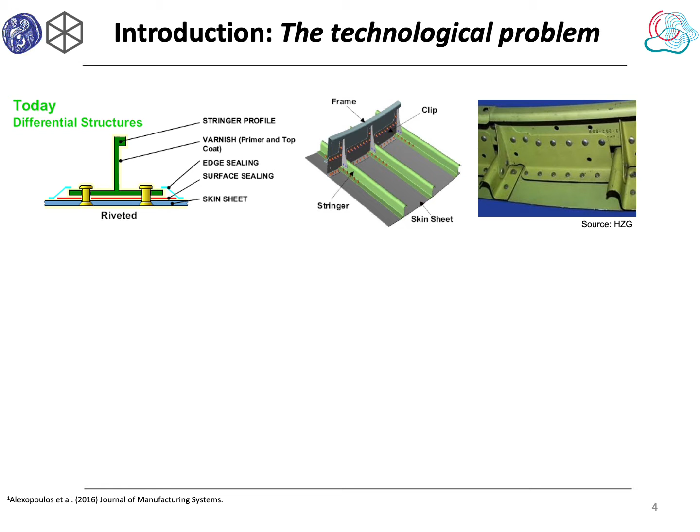Beginning with the technological problems, all traditional design of aircraft structures have been made by fastening differential structures with rivets. It is obvious that riveting increases structural weight. The new trend involves joining techniques as to replace riveting with fusion welding. It is estimated that structural weight can be reduced by 15% and respective cost by 30%.

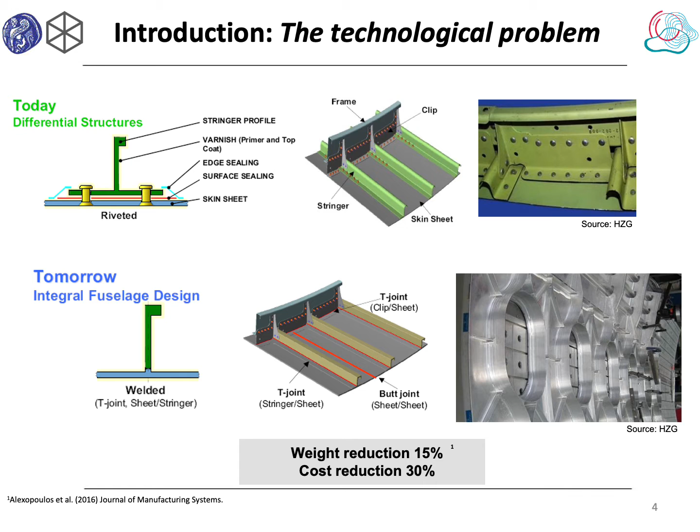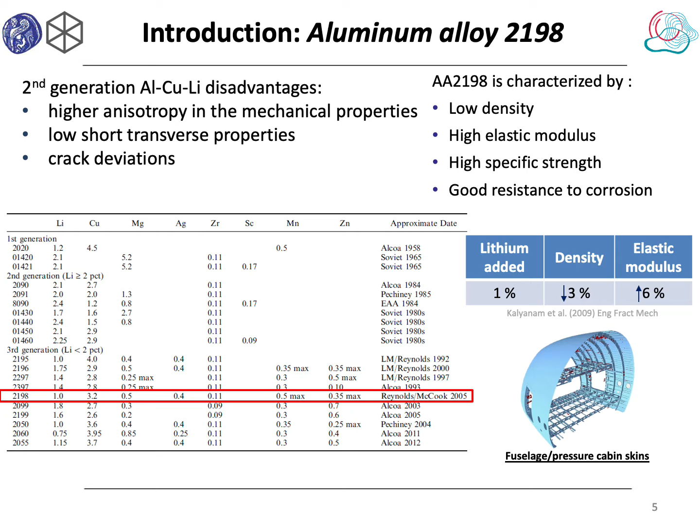Lithium is a metallic element with low density. Therefore, it was introduced to aluminum alloys to reduce weight. Nevertheless, this attempt had specific disadvantages, for example, high anisotropy in the mechanical properties. Aluminum alloy 2198 is a third-generation alloy with lithium and copper addition and has been recently developed.

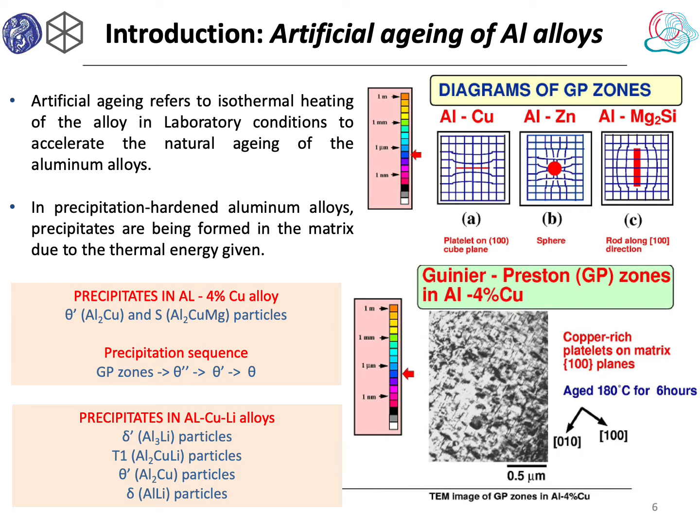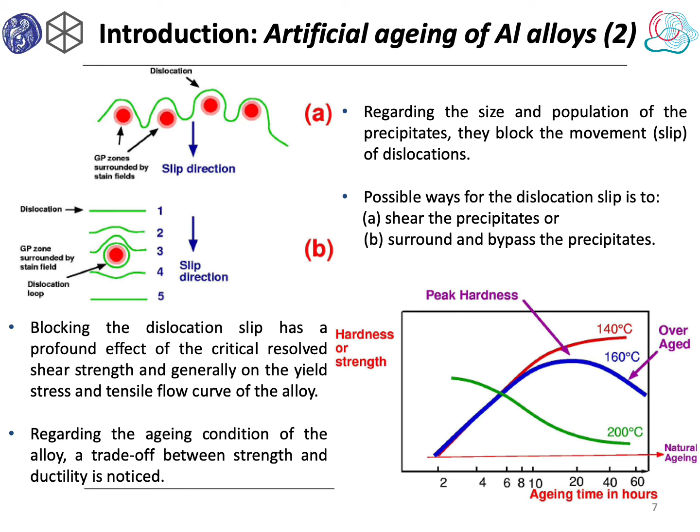This alloy is a precipitate alloy. By this I mean that with natural aging or with artificial aging, the quasi-static properties are changing. We don't have one mechanism, but we have 4 different, so that makes the situation more difficult. But why do we need these precipitates? Because they are blocking the dislocations. By blocking the dislocations, you can increase strength and you sacrifice ductility.

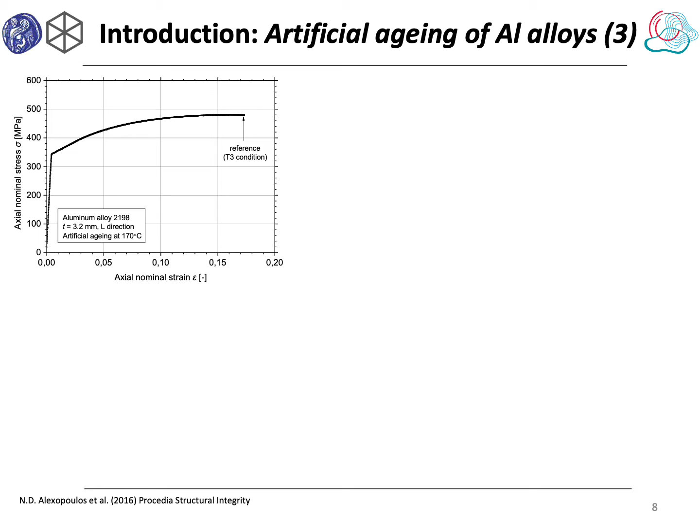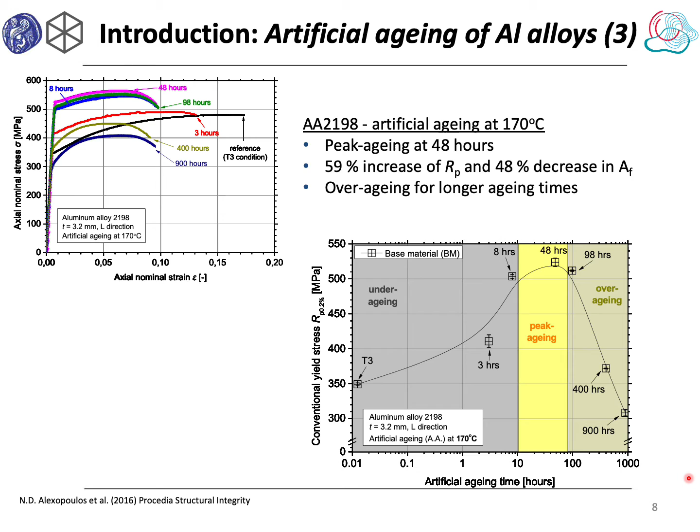The tensile mechanical behavior of various artificial aging times was examined in the literature. Here we can see stress-strain curves with increasing aging times up till 900 hours. More analytically, yield stress continuously increases with aging time up to 8 hours. This increase in yield stress is characterized as the under-aged region. A plateau in the yield stress was noticed from 8 hours up to 48 hours aging time, which is characteristic for the peak aging condition. Finally, by further increasing the artificial aging time to 98 hours, there is an essential decrease in the yield stress due to the coarsening of the precipitates, so this heat treatment condition is considered to belong to the over-aged region.

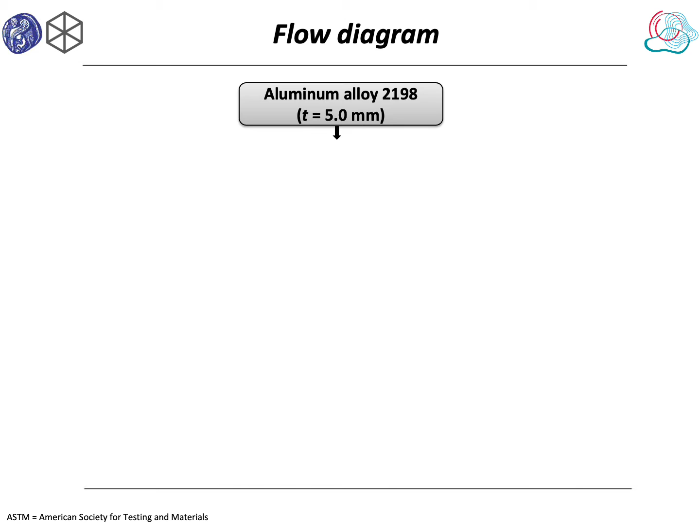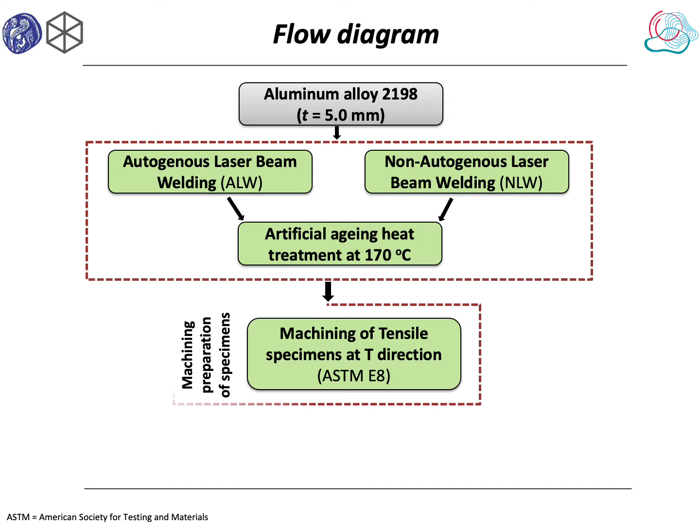Continuing with the experimental procedure. We investigate aluminum alloy 2198 with 5 mm thickness. Some of the sheets were autogenously laser beam welded, and some of the sheets were laser beam welded with filler material. Then the sheets were post-weld heat treated at 170 degrees. From both welds, tensile specimens were machined, and then we had the microstructure analysis, the mechanical testing, the evaluation, and the conclusions.

For the welding, we used a fiber laser with maximum 8 kW power. Argon was used as a shielding gas for both autogenous and non-autogenous welds. For non-autogenous welds, aluminum silicon 4047 was used as a filler material. Here we can also see the welding parameters that were used.

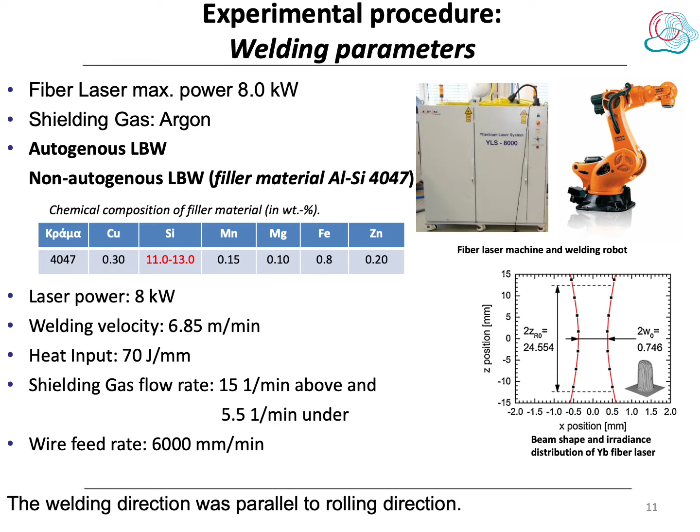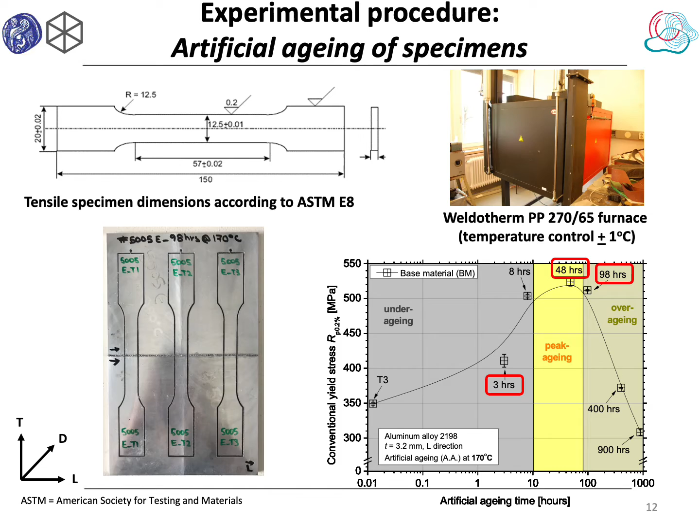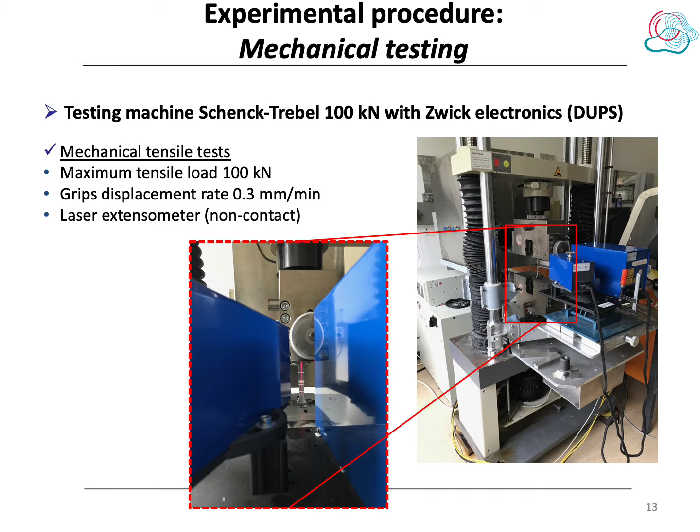This slide depicts the standard tensile specimen geometry according to the ASTM specification. The artificial aging heat treatments were performed in the furnace at 170 degrees and for 3 different artificial aging times, which were selected according to the literature, namely 3 hours, 48 hours, and 98 hours, in order to correspond to underaging, peak aging, and overaging conditions respectively. The mechanical tests were carried out at Helmholtz-Zentrum Hereon with a testing machine using maximum tensile load of 100 kN.

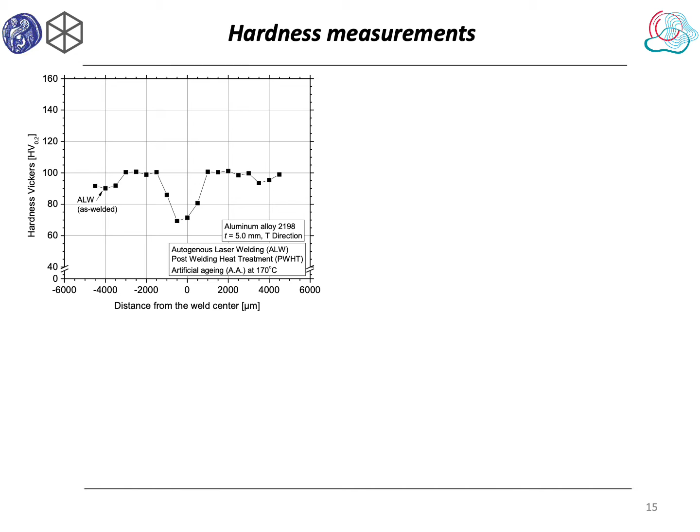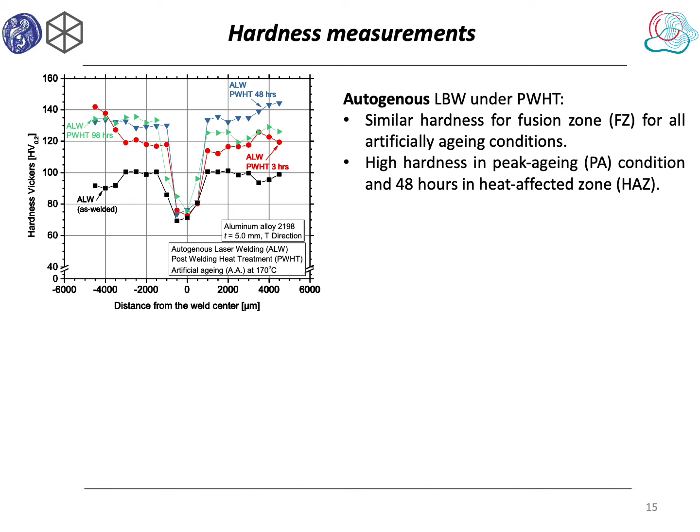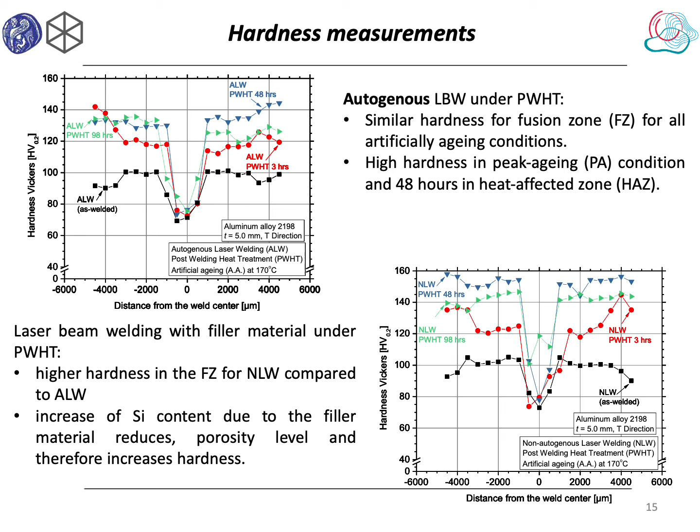Continuing with the analysis of the results, here we can see Vickers hardness versus distance from the weld center for autogenous welds under different artificial aging conditions post weld. With increasing aging time, the fusion zone presents similar hardness for all conditions. Higher hardness can be noticed for the peak aging condition at 48 hours. Non-autogenous laser beam welds with increasing artificial aging times present higher hardness compared with autogenous welds, which can be attributed to the use of the filler wire and the increase of silicon content.

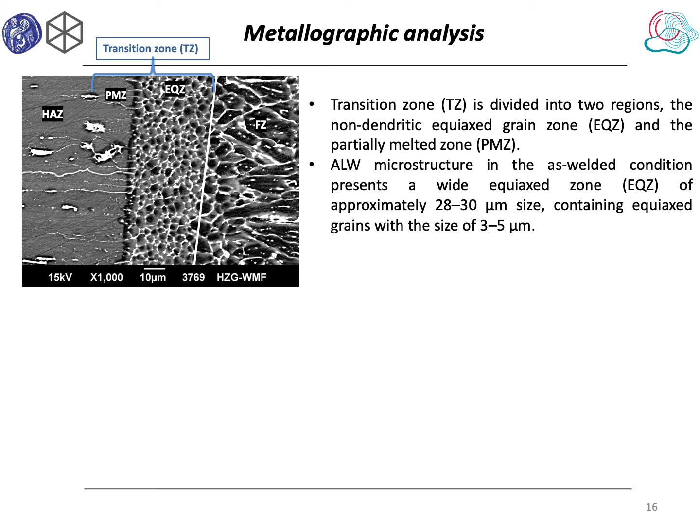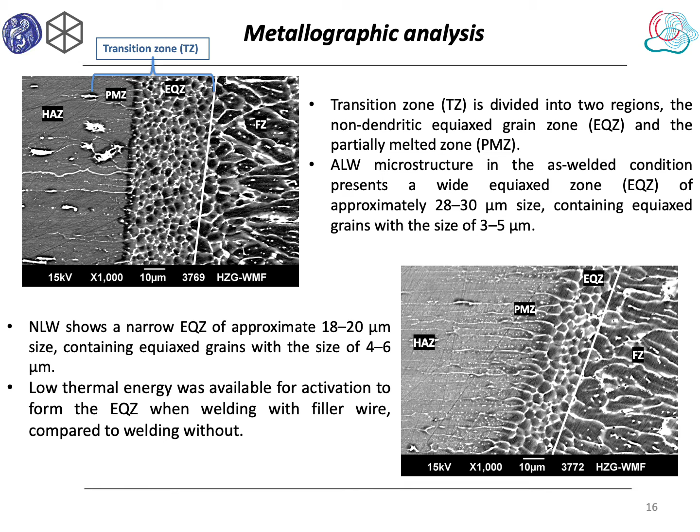For the metallography analysis of autogenous welds and non-autogenous welds, the transition zone is divided into two more zones: the equiaxed zone and the partially melted zone. The equiaxed zone contains equiaxed grains with random crystal orientation. The fusion zone next to the equiaxed zone is composed of columnar grains and in the center of the fusion zone of equiaxed dendrite grains. Non-autogenous welds show a narrow equiaxed zone due to the low thermal energy during welding when compared to the autogenous welds.

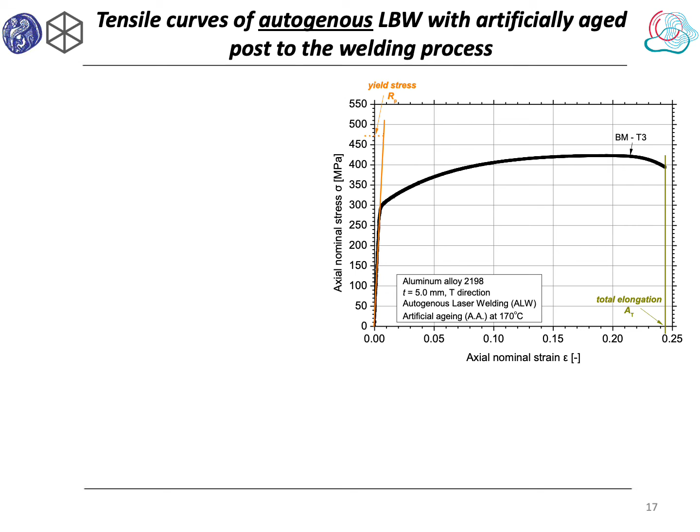For the tensile stress-strain curves of the base material, with increasing aging time, total elongation at fracture reduces from 24% to 13%, while strength increases up to 48 hours and peak aging condition. For autogenous welds, with increasing aging time, ultimate tensile strength increases up to 260 MPa, while total elongation at fracture decreases from 4.5% to approximately 1%.

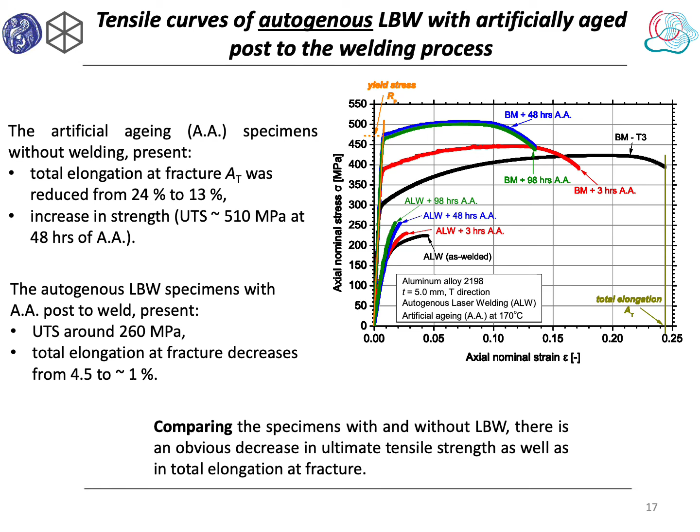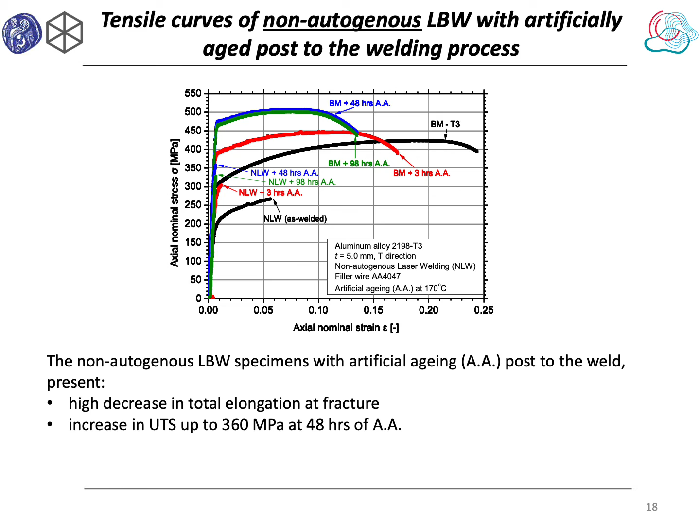Comparing the specimens with and without laser beam welding, there is an obvious decrease in ultimate tensile strength as well as in total elongation at fracture. Non-autogenous welds, with increasing aging time post to the weld, present a higher decrease in ductility and an increase of ultimate tensile strength up to 48 hours and peak aging condition.

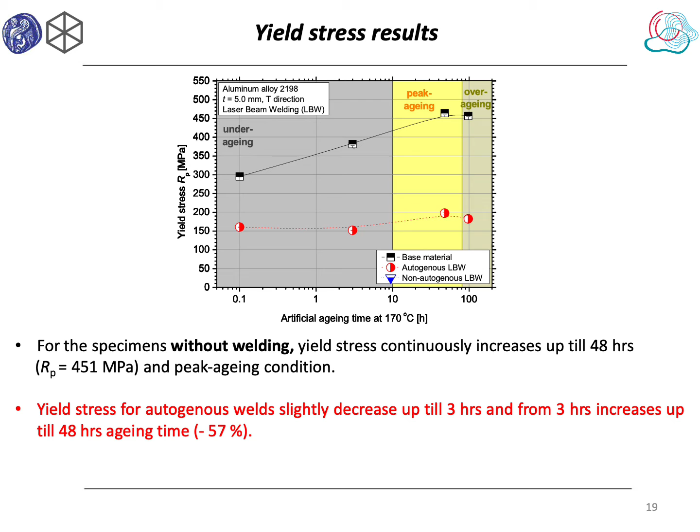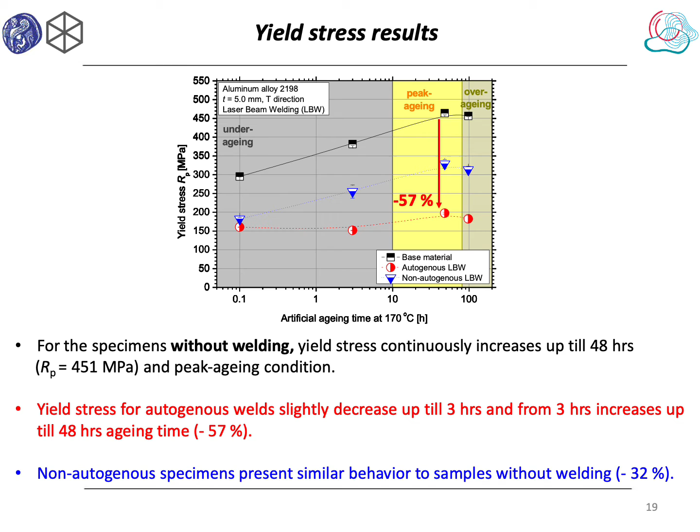Here we can see yield stress versus artificial aging at 170 degrees. Base material specimens present a continuous increase up to 48 hours and peak aging condition. Autogenous welds, with red, present an increase from 3 hours up till 48 hours, which is approximately a 57% decrease compared to the base material. Non-autogenous welds, with blue, present similar behavior to the base material samples with a decrease of 32%.

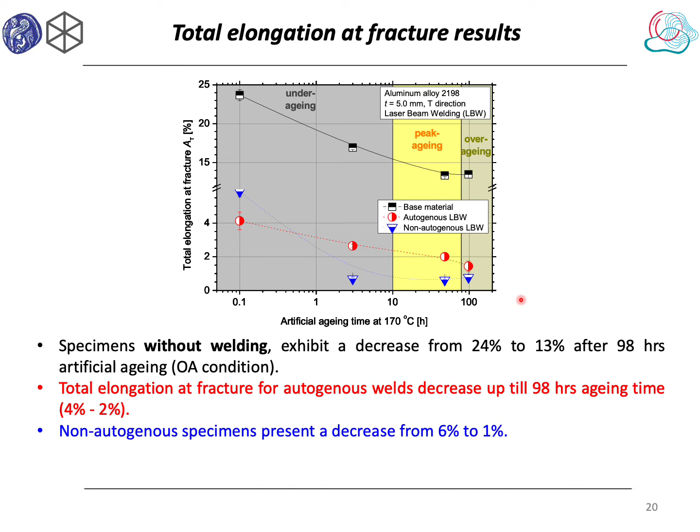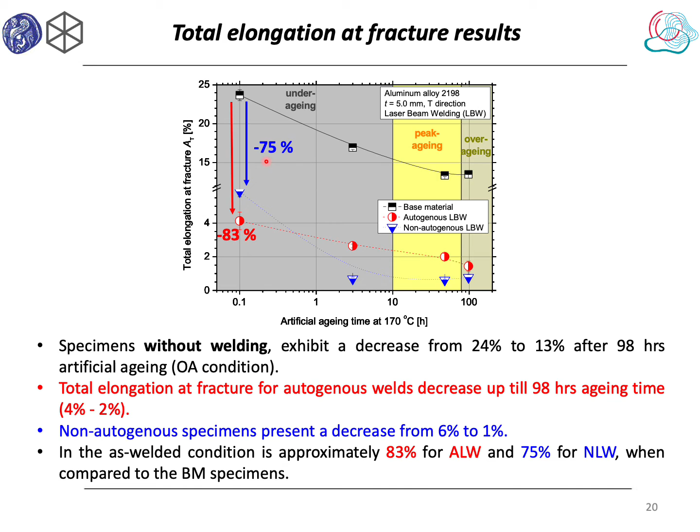Total elongation at fracture, with increasing artificial aging time, for base material presents a decrease from 24% to 13%. Autogenous welds show a decrease from 4% to 2%, while non-autogenous specimens present a decrease from 6% to 1%. For example, in the as-welded condition there is an approximately 83% decrease for autogenous welds and 75% for non-autogenous when compared to the base material specimens.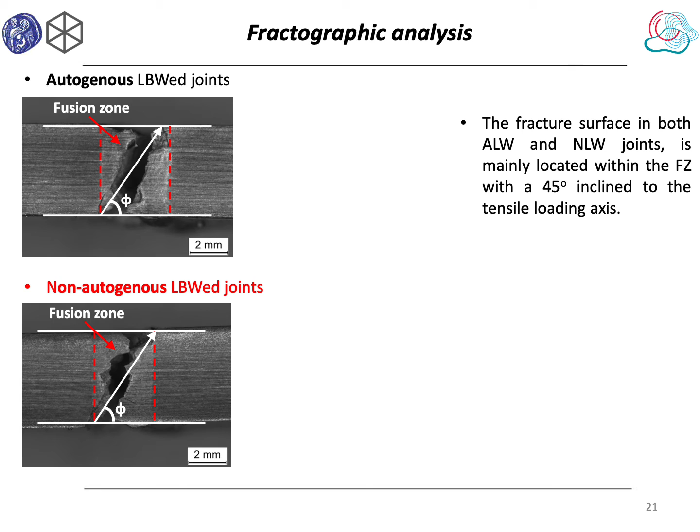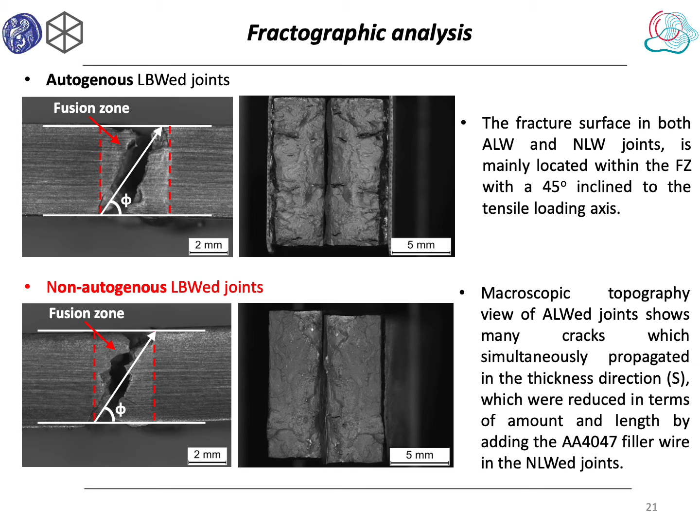The fracture surface in the laser beam welded aluminum alloy 2198 joints, for both autogenous and non-autogenous welds, is mainly located within the fusion zone, inclined 45 degrees to the tensile loading axis. This fracture behavior is independent of whether the welding joints were produced autogenously or using filler material. Nevertheless, it can be observed that the overall macroscopic topography view of autogenous joints shows many cracks which simultaneously propagated in the thickness direction, which were reduced in amount and length by adding the aluminum alloy 4047 filler wire in the non-autogenous welded joints.

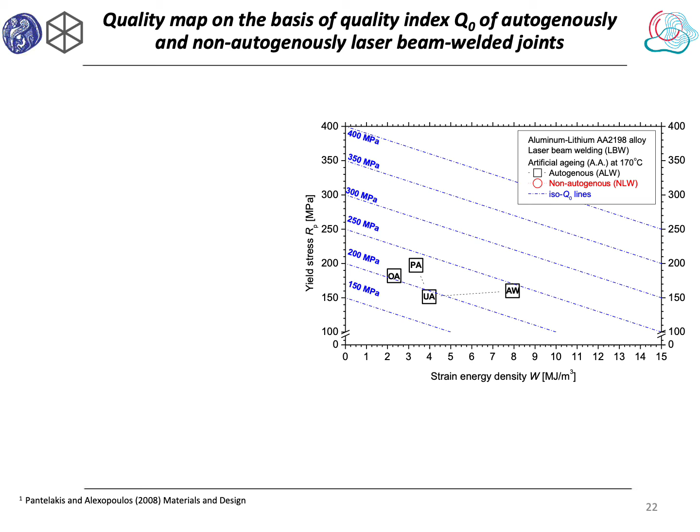The quality indices concept was exploited to select the optimum quality between the different heat treatment conditions of autogenous and non-autogenous laser beam welds of aluminum alloy 2198. Here we can see the definition of quality index according to the literature, where Rp is the yield stress, W is the strain energy density, and A is a constant according to the literature. Here we can see yield stress versus strain energy density, while with blue lines we can see the iso-quality index lines.

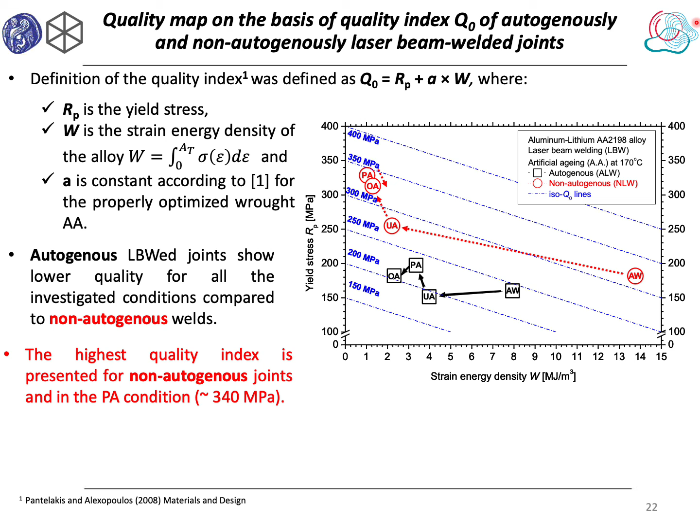The autogenous joints show high quality for peak aging condition and 48 hours. For non-autogenous joints, it can be noticed that the quality index is higher for all the investigated conditions compared to the autogenous. The highest quality index is presented in the peak aging condition, approximately at 340 megapascal. However, it is questionable if the design engineer will use such a material with limited ductility capability, let's say less than 1%. To this end, this diagram may be used to select a specific condition for aluminum alloy 2198 welded joints, which is expected to lead to an acceptable combination of yield stress and tensile ductility.

It is up to the design engineer's prerequisites on yield stress and tensile ductility capability to decide on the appropriate artificial aging condition with the highest possible quality for mechanical performance.

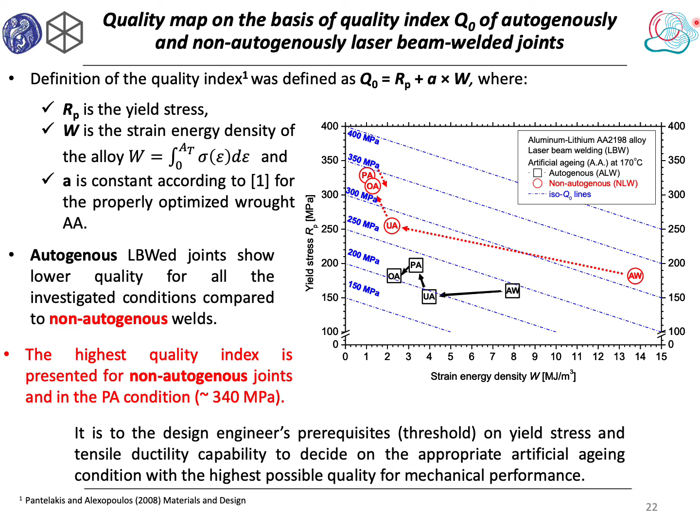To conclude, higher hardness is observed in the fusion zone for non-autogenous welds compared to the autogenous, which can be attributed to the exploitation of the filler wire. Due to the different laser beam power and thermal energy, a wider equiaxed zone is present in the case of autogenous welds when compared with the non-autogenous.

Autogenous and non-autogenous welds of 2198 alloy show a decrease in yield stress in the as-welded condition, approximately 46 and 38% respectively, when compared to the base material. For the case of the post-welding heat treatment, yield stress attains higher values in the peak aging condition. Fractographical analysis showed that all failures of specimens were mainly located in the fusion zone of the cross-section of the weld joint, with an axis approximately 45 degrees inclined to the load axis.

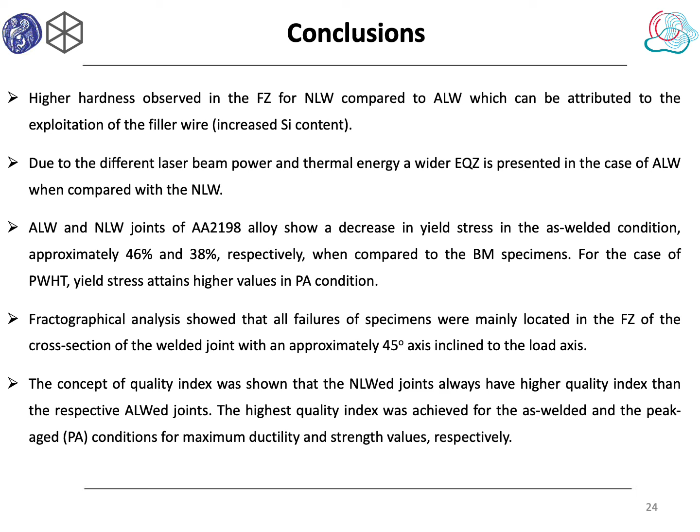The concept of quality index showed that non-autogenous welded joints always have a higher quality index than the respective autogenous joints. The highest quality index was achieved for the as-welded and the peak-aged condition for maximum ductility and strength value respectively.